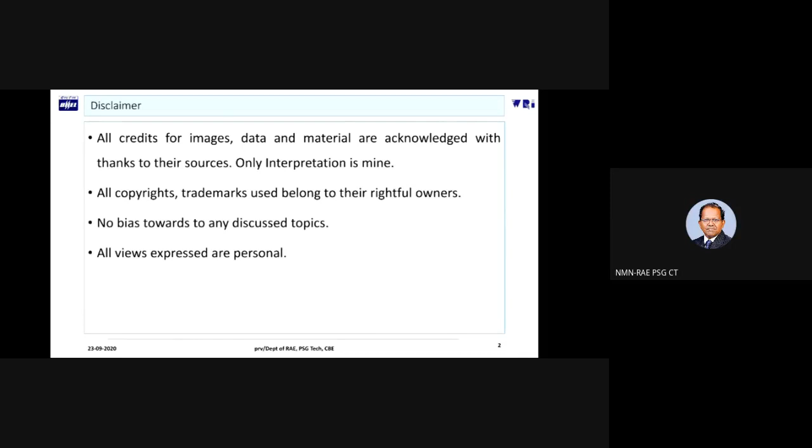Sir, audio is not too clear. Yes, sir. Yes, sir. Venkateswaran, sir. Venkateswaran, sir.

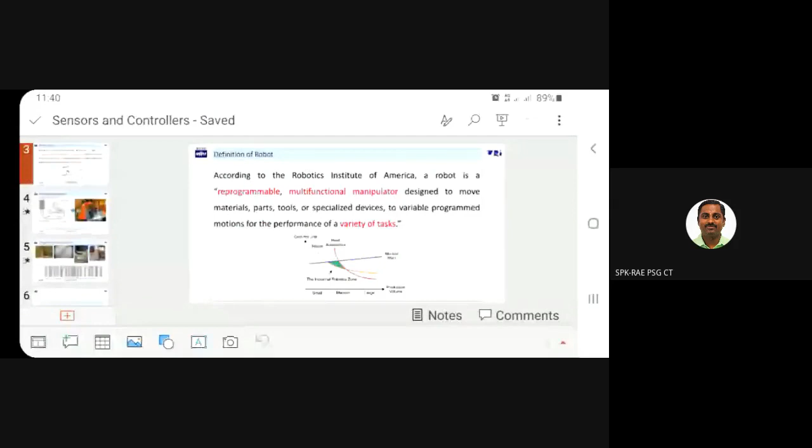So now I hope I am audible and visible. Hello? Yes, sir, fine, great. Sir, can you make it full screen, sir? Yeah, I am making it full screen. Is it okay now? Perfect, sir. Okay, thank you. Thank you.

So we will start with the definition of what a robot is, because this will give us an understanding of the background of what we are trying to understand as sensors and controllers. A robot is differentiated as a reprogrammable device, and it can be used for doing a variety of tasks. Now, when we say reprogrammable, and when I am aiming at a different set of tasks to be performed by the device, I need a set of inputs that are required for this reprogramming, or that are required for reorienting the device to perform a set of tasks.

So that is where the critical nature comes in - what type of sensors I need to consider, and what I am going to do with the inputs received from the sensors. So these two things are to be considered with respect to the nature of the definition that we are associating with the device itself.

Where I am looking at a medium volume of production and I am also looking at reducing cost, there could be an argument that if the volumes are more and if the costs are to be reduced, then we would like to go for a robotic automation.

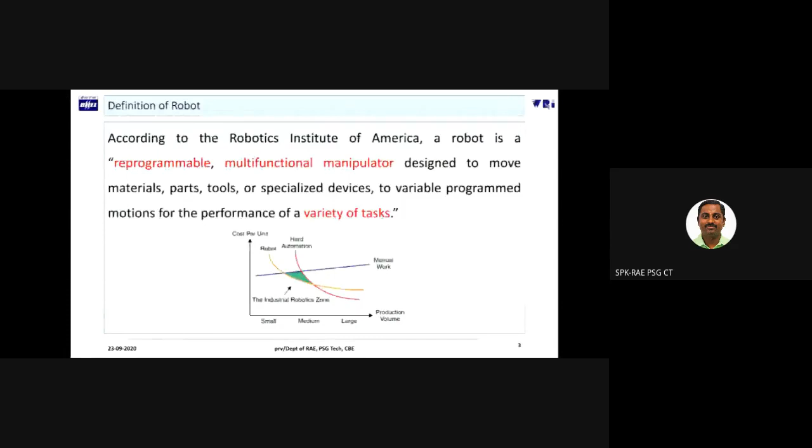So this is the introduction that I would like to consider for robots. Now we will take this robot into a welding option. Whenever we talk of welding, this is an image which I can give you as the definition of welding.

So we have certain set of equipments, we have the job or workpiece, and when the job gets connected to the workpiece, then I expect that the robot that I am going to use will substitute the functions of the human being that we are going to see over here. So this is what the figure will look like in case of a robotic welding.

So what is the challenge here? The challenge is to replicate the functions of the human being exactly to the process. Which means I need to be aware of what is happening in the mind of the welder, what are the things that he is going to sense, and then accordingly act upon those information. The same thing is to be replicated for the robot also.

Now, practically speaking, it is not possible to replicate a human being, no matter how good you are with respect to science and technology. It is practically not possible to duplicate the functions of the human being at least. So we can come somewhere near to the functions by targeting what he is doing and then trying to do it to the best of the ability of the available resources with respect to whatever that we get in terms of the inputs and in terms of the control action that is feasible with respect to the mechanical devices.

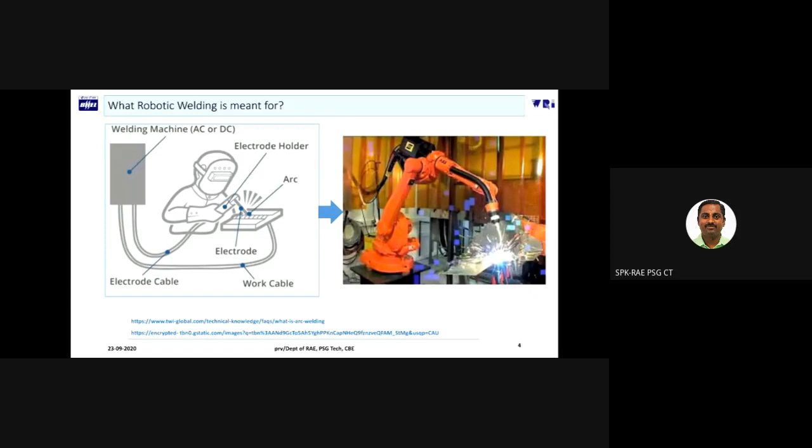So here I have two parts. One is the sensors, that is, I am going to take upon the inputs from the operating environment. The robot is going to take it, and then the controlling action, the robot executes some kind of a response to the information that is being made available in the operating environment. So the goal is to be as good as this welder in getting a quality weld done. This is what we are trying to define or see as an understanding for what a robotic welding is.

With this background, now we would like to seek what are going to be the challenges that this welding option presents to us. A typical problem with respect to any process is it should be possible for us to understand what is happening straight away. We call it in a very crude way, I would like to call it as linear.

Linear means I can get to have an understanding, or it is possible for me to extrapolate what is available as information into the future, so that it is possible for me to predict what is happening and accordingly take an action. We all know that welding is a highly non-linear process. Which means this is, as a process itself, welding is non-linear. And if I want to implement the process with respect to an automated environment, I add to the complexity of this non-linearity for handling.

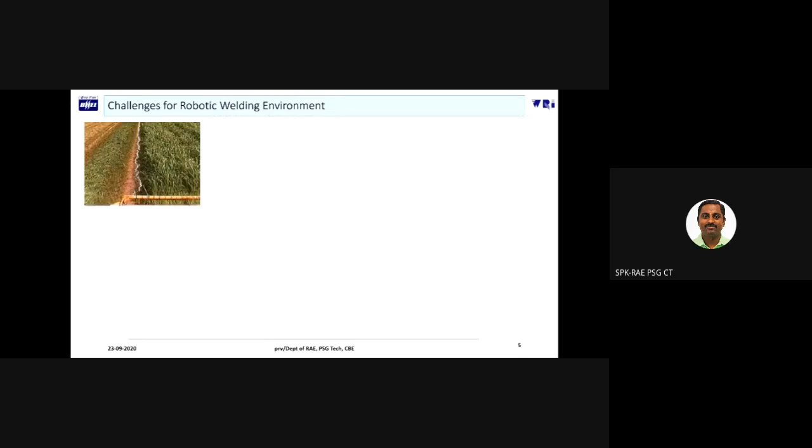So a simple example of what you call diagram is given here. This is an image of a crop field. Now imagine I'm going to do an automatic harvesting, using a tractor or some kind of a cutting device associated with a tractor. If my goal is to cut across the crop boundaries, it doesn't picture a linear movement here. Please understand, the white lines that you see over there present a varying profile with which I have to operate.

Same thing is being done with respect to what we call it as a weld. Weld seam is not going to be straight. So how are you going to accommodate in your sensing and control to aim for a proper seam? So this is the essence of considering a robotic welding sensing or control. This is very, very important for us, because what we typically consider as a perfect weld seam is available only on paper. Whereas in practice, we will not be anywhere near to this particular weld seam. Even that can be, what you can say, managed to a larger extent.

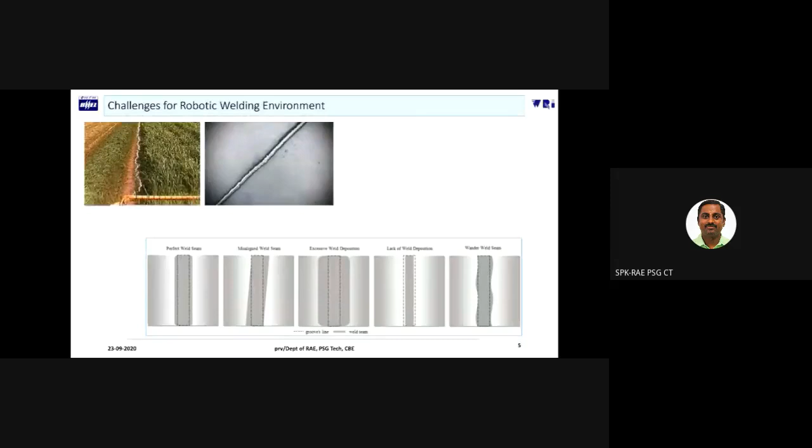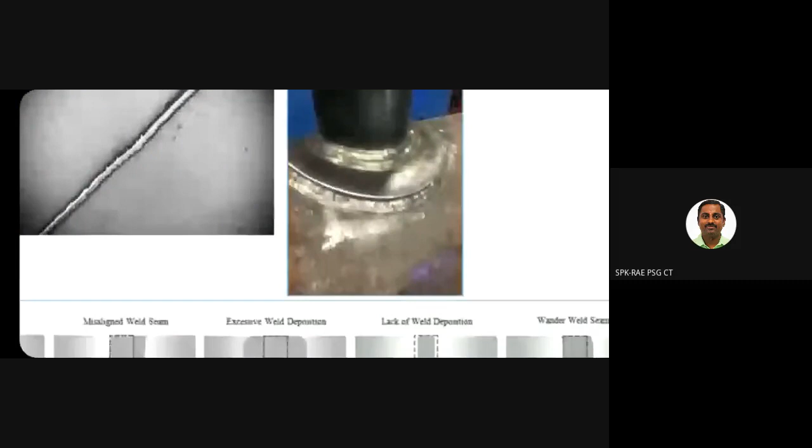Okay, if we have proper algorithms with which we can understand how the weld seam is going to take shape. But if I need to add more complexity, just look into this. The weld seam is not linear or as perfect as we would like it to be. In addition, I am also introducing another complexity in terms of the axis. Okay, so the job is going to be done on a pipe, for example.

The weld seam will have a profile which cannot be traced linearly. So in addition to how non-linear it is, I also need to understand in what profile it is going to be taken care of. So this is one task that I need to consider. I can increase the complexity. For example, I can rotate the job also.

Okay. So even if the weld seam is going to be perfect, so-called perfection, if I am going to rotate the job, then I am going to be in further difficulty in considering, with respect to direction and application, what should be my sensing and then control action. So the challenge is, in a way, a unary challenge, a simple challenge to perceive what is going to be the weld seam and then continue to operate with respect to the defined weld seam and accommodate the differences that are coming in practice.

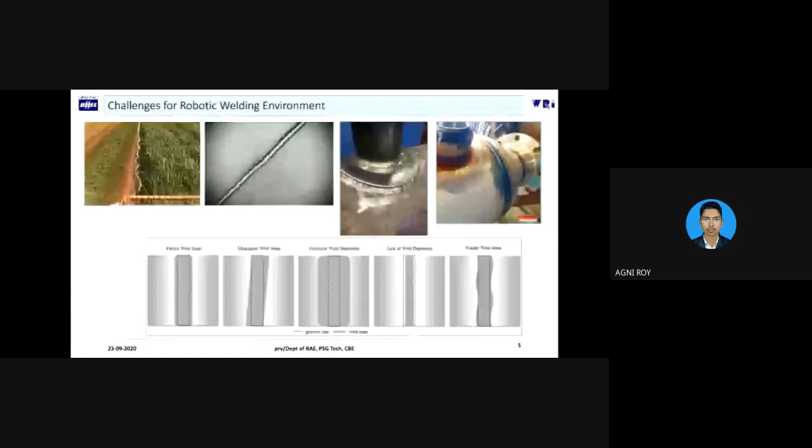So this is going to be the primary challenge that we face in the robotic welding environment, for which I am supposed to have sufficient sensors and I am supposed to have good enough control action. So with this background, now I will get into an introduction of what we mean by sensors in a robotic environment and what are going to be the different types that are to be discussed.

So before getting into the robotic environment, there is a slight differentiation that I would like you to consider. There are two steps in any kind of operational environment. So I can look for mechanizing the operating environment, or I can look for adding a robot into the operating environment. Both are not going to be the same, but the sensors that we are going to deploy can be considered as similar or having similar requirements. The objective of whether it is mechanized or it is going to be robot can be differentiated later with respect to the control action.

Basic difference between a mechanized arc and the robotic arc is with respect to the definition of what a robot is. It is reprogrammable. It is not a hard automated environment. Okay, so it is not a fixed task. Suppose, for example, tomorrow you would like to shift from one job to another job. There should not be any changes made to the setup in terms of hardware. You can just change your program and it should be possible for you to execute the task. So this is what we mean by a robotic environment, and it should be differentiated with respect to a simple mechanized arrangement to execute a welding action.

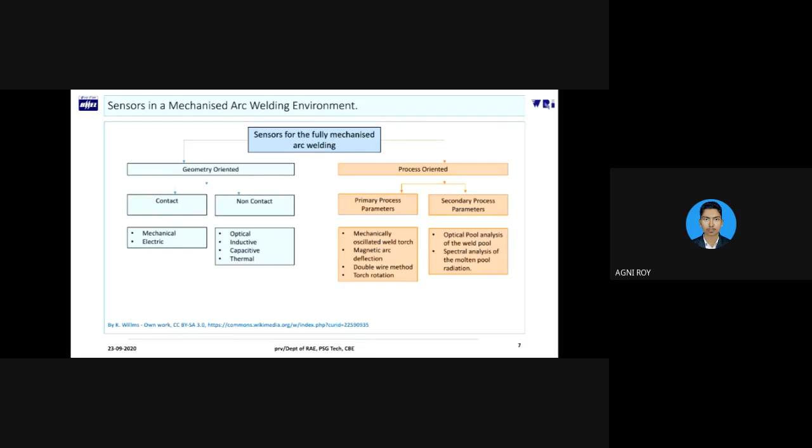Now, please understand this process-oriented sensing mechanism again will demand something of the kind that we have discussed in the first part, of contact or non-contact. So, to get to know, for example, the angle of the torch that is being used, I need to have some kind of a transduction mechanism which will give me that information. So, broadly, this is what a sensing mechanism for a mechanized arc welding environment will involve itself with. So this we have to consider for a robotic environment.

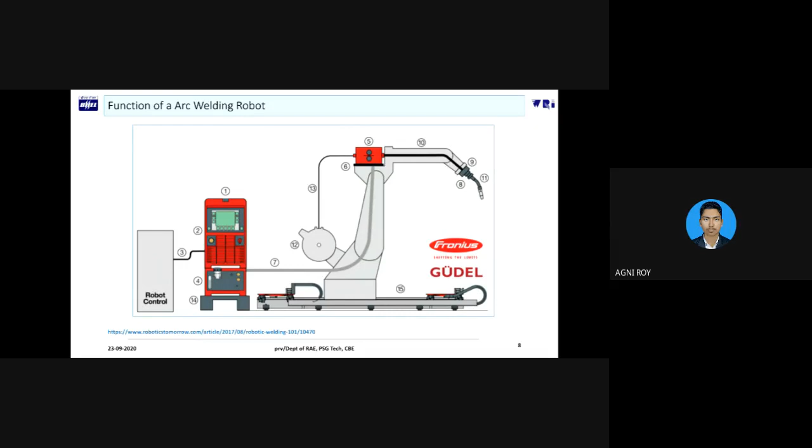Now we need to ensure that whatever information is available at the workpiece is communicated to the controller. The welding equipment is not the controller. A controller is a separate part which will be the master in this operating environment. It will dictate what needs to be done to the welding equipment, to the robot, to the torch, etc., so that the welding operation is executed as per the requirements. So this is the functional view of how we look at the welding robot.

So for this robot, what are the different types of sensors that we may be in need of? We can classify them, but we need to understand certain things before that classification. Sensors, like robots, come in a variety of shapes, sizes, and costs. Even functions we can add. So there is nothing like a generalization. Because a sensor works for a particular operating environment or for a robot, we cannot say that that sensor can be used for each and every option. We have to be very, very careful. We have to be aware of it.

The next part is still more interesting. A sensor alone is not good enough. Let us say I get you the best sensor possible, today the best available laser seam tracker. Just putting that laser seam tracker into your operating environment doesn't mean anything unless it is backed up with good enough programming software and also a reasonable feedback mechanism with respect to the controller.

So it always has to be ensured that the software that is going to be integrated with the operating environment is robust enough to process the information that is available from the sensor and then respond back to the environment. So this has to be ensured. So this is what we are trying to highlight as the positive aspect of how we go about a robot.

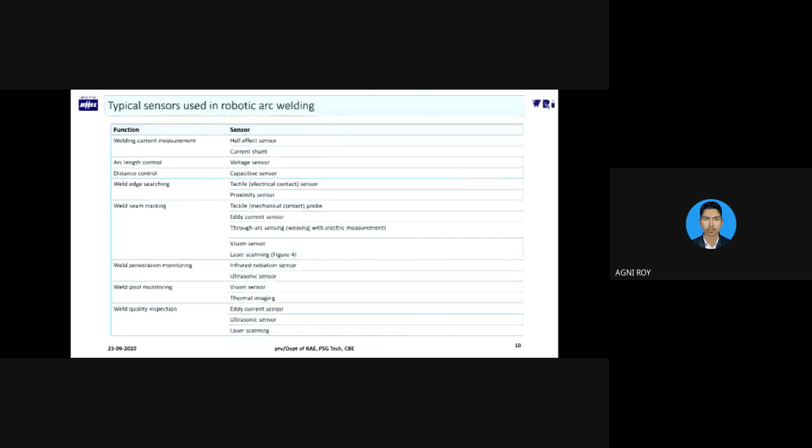So now we will get into the different types of sensors that could be related to robotic arc welding. In the previous case, we have seen that they can be classified as contact, non-contact, etc. Presently, we are going into specifics. To know what sensor, I need to know in the first place what information I am looking for. For example, I would like to know the arc voltage. Then I need a voltage sensor. This voltage sensor could be sourced from any of the transduction principles that we have considered before. It could be capacitive, inductive, non-contact type, contact type, etc. Those are all the possible types which can be used here for the purpose of the measurement. Similarly, I can go for welding current.

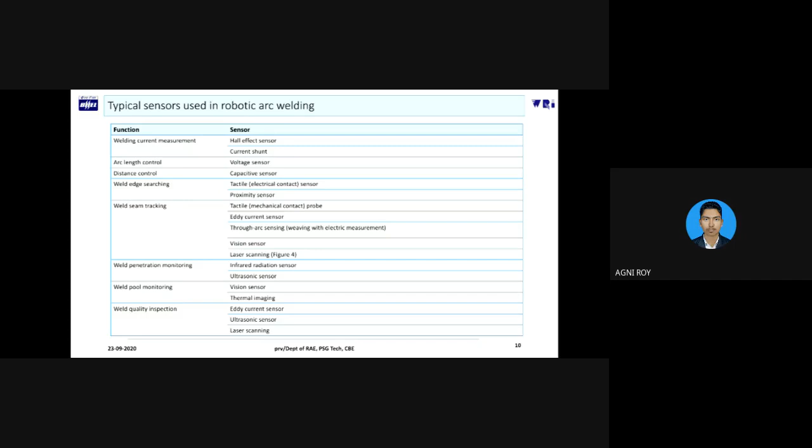For example, if you are going to consider a welding current sensing requirement for a robot, the best two options are either a Hall effect sensor or a shunt. Hall effect is a very rugged type of sensor that is available across different ranges. I can even go up to 1000 amps and 1200 amps, and it provides a very reliable measurement of the variable. On a relative scale, if you give me an option to choose, I will always go for a Hall effect sensor. But with respect to the placement, if I am not able to place it properly or the placement is not comfortable enough, then I would go for a shunt option. Shunt is also very rugged, but I prefer the reliability of Hall effect over shunt for current measurement.

Similarly, we can extend our requirements to arc length. Arc length doesn't give you many options. It has to be a voltage sensor. We typically measure it across the plus and minus terminals of the given welding equipment. With respect to distance, we have many options. The typically used option is a capacitive sensing mechanism. I can also use, for example, a proximity sensor. The preferred choice, we can say, is capacitive.

I can have the requirement of sensing the edge, or knowing where I need to start the weld or stop the weld. In that case, I can again go for a proximity sensor or a tactile sensor. There's a very subtle difference between distance and edge. Distance is the remaining path. The edge is going to be the beginning or the end.

So it is kind of a spot measurement. That is what we are looking for when we try to define this edge. Similarly, we are going to talk of tracking. Tracking is again a continuous mode of measurement. So we can use different options, scanning, vision sensors, etc.

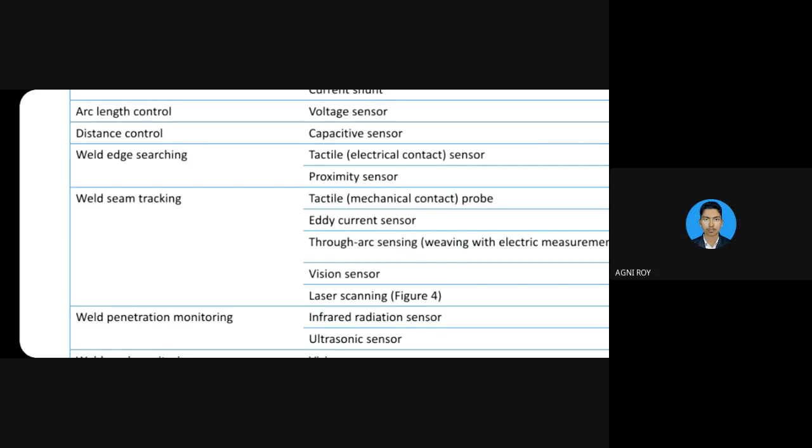So the features of the weld seam can best be correlated by using such image processing algorithms with a vision sensor. If your application is at a lower scale of cost competency, then we can use a simple tactile or other type of sensor. Otherwise, I would like to go for a vision sensor when it comes to weld seam tracking, because it gives the best possible results.

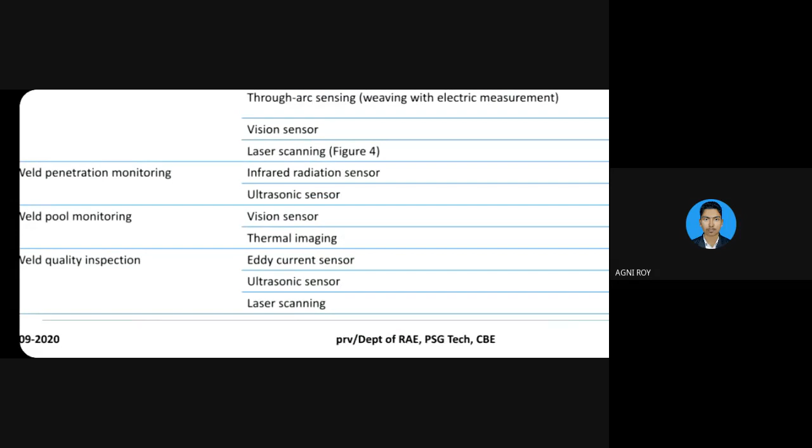Similarly, if you are interested in weld penetration monitoring, we can use a non-contact type sensor, with the principle of transduction being IR or ultrasonic. Weld pool monitoring is also possible, again using a vision sensor or thermal imaging.

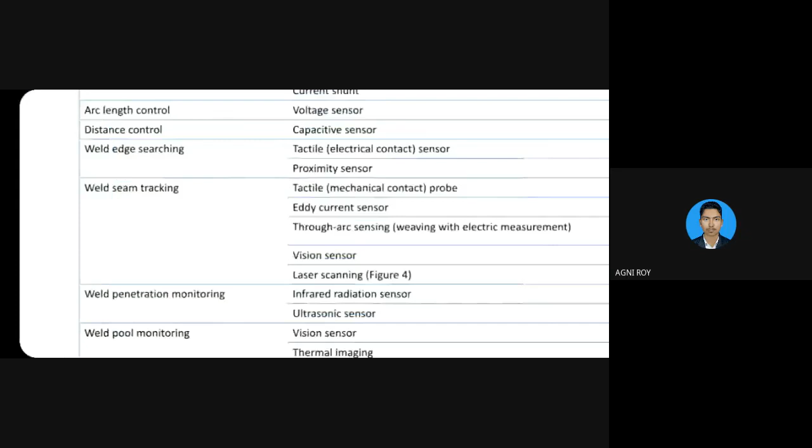We need to remember that in all these applications, whenever we talk of weld seam or anything related to weld, we are talking of temperatures around 3000 degrees centigrade. So we need to be very careful with respect to our choice of mechanism and choice of vision system, ensuring they are suitably protected and able to work under those particular operating conditions. These are the typical sensing requirements for which we choose our sensors from the table we have already given as types.

So now we will go for one of the four choices, if you remember. We are going with the first one: a very simple understanding of what a wire's touch sensor will do. In simple terms, we can call it a touch sense. It is nothing but having physical contact with my workpiece, which lets me know where to start with respect to that particular location. I can have the axis known before me, and deduce the location of my present touch with respect to my defined axis location.

So this touch will enable some kind of conductivity, for example electrical in nature. It means it will be measured in terms of some change in resistance, how much current is flowing in the circuit, and therefore where that particular location is. That can be easily correlated. So the conductive surface is identified as a point where I'm going to start my weld, continue my weld, or locate my...

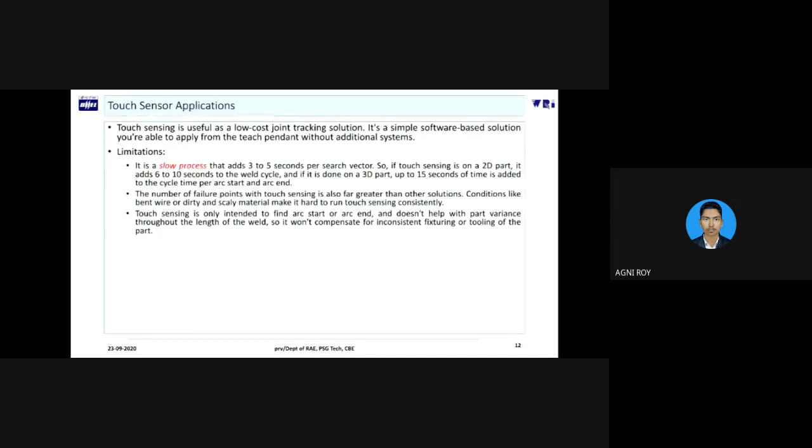So this is only intended to find an arc start and arc end typically. That is going to be the application, and it doesn't help with part variance. Part variance in the sense, let us say there is going to be high-low, unfortunately, in the fit-up. With this, it will not be possible for us to appreciate that.

So touch sensing only says point 1 and point 2. If they are misplaced, or there is going to be some kind of misalignment, for example in the joint, it will not be able to appreciate it. So you will go along as if it is a perfect fit, which means that your weld penetration or weld joint may become improper.

So the useful implication here is, if I have a very controlled operating environment for my welding job, this will work very fine. If there is going to be much more uncertainty associated with the operating environment, it is very important for us to be careful about what we are choosing here.

Touch sensing is also limited by weld joint type. How we go about it, because I need a differentiation, since energy flows only when there is a difference. I need a high and low reference to appreciate that the job has a height of 3 mm, 2 mm, etc. If I am going to have a butt joint, for example, I am at a loss, because I will never know where is my reference point. So it is very important that the applicability of this sensing mechanism be considered.

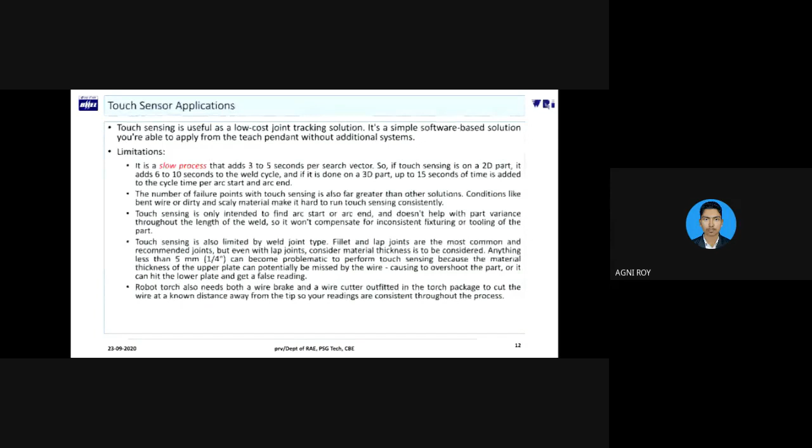The torch also needs to have some kind of extension, because, as I said, typically it is an electrical way of understanding. So when it is an electrical way of understanding, when you make a contact, the information is provided as the resistance in the conducting path.

Unfortunately for us, some kind of dirt, or over a period of time a small difference in the diameter of the wire because of heat, can cause a change in the resistance which can significantly change the value that you are going to sense, which becomes misinformation. So this is another interesting thing. We have to be very careful.

Either it has to be part of this torch mechanism, or it can also be done externally, like you do in a GTAW process, where you sharpen the tungsten tip at regular periodic intervals. A similar thing is also to be considered here. It also requires clean edges, which is something we have already discussed.

Now let me go a step further. We will talk of seam tracking. Instead of having only point A and point B and presuming a linear or nonlinear relationship between them, now I am upgrading my requirement to understand the instantaneous value of what the seam is at a particular instant of time. This is what we are trying to consider as a through arc seam tracker.

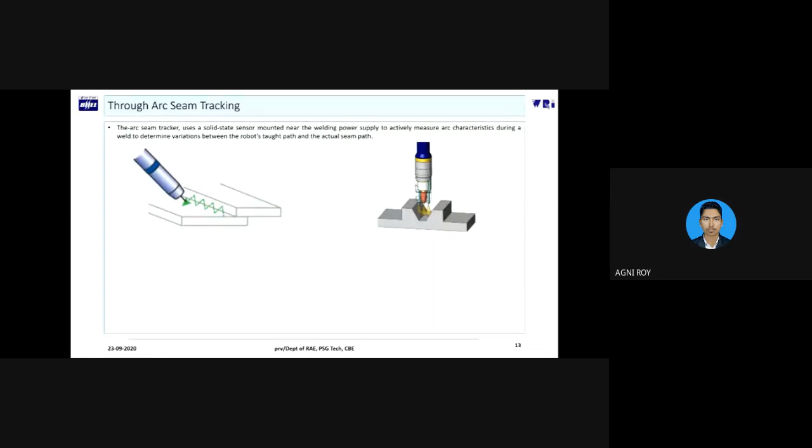Suppose there's a disturbance in the arc characteristics, then it indicates that something is not okay. So how do we compensate? We try to extract information based on what is available when the arc is actually being made on the job. Previously this was presumed, we had an assumption that it would be linear or exponential. Here it is actual, based on that particular disturbance at a particular time interval at a particular location. It will be possible for me to respond to what could be the actual state of the condition. So this is all called through arc seam tracking, that is TAST.

This is difficult with respect to thin material. Again, the problem is the reference is not with respect to vision, but with respect to location. So the limitation is it adds time. It may be difficult for us to perceive a difference when the thickness is less, and it is also limited to a certain set of materials, because it largely depends upon the conductivity of the material. If the conductivity is good, if it is very sensitive towards variations in electrical voltage, then I get a good reading. People who are not conductive, or outside the border of good conductors, will have trouble, because the signals we receive will not be reliable.

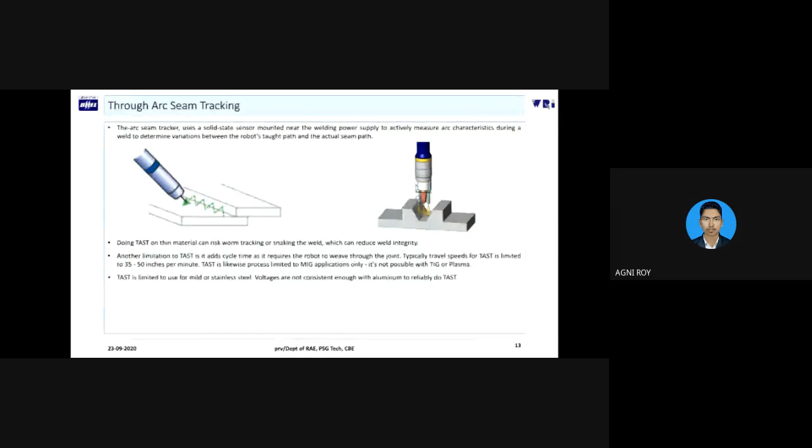So this is very, very important. I again repeat, when you go for the choice of sensors, please understand the operating environment. Consider all variables in your operating environment, including the material you are going to weld, because that makes a big difference with respect to what information you receive and how you are going to process it. The conditions of the material, here again, make a huge difference.

As I said, misinformation is much more dangerous than no information. If there is no information, we can suspect that something is not working. But if the information is misrepresented, then we have no idea. We will be giving a control signal which has nothing to do with the actual operating environment. So the conditions of the material have to be proper, otherwise we should not opt for this.

Dry runs cannot be simulated and observed directly. This can probably be compensated to some extent in a simulation environment, whereas practically, only if you weld will you come to know the arc characteristics. Therefore, any kind of dry run is limited in that sense.

That could be used for tracking. So these are all going to be part of what we call the robotic working environment itself. There is nothing to be added, probably the solid state sensor is an addition, but otherwise nothing else is needed for the robot to perform its duty. Now we are coming to a possibility of an upgrade, a technological upgrade, which will give us more precise information about what we are looking at.

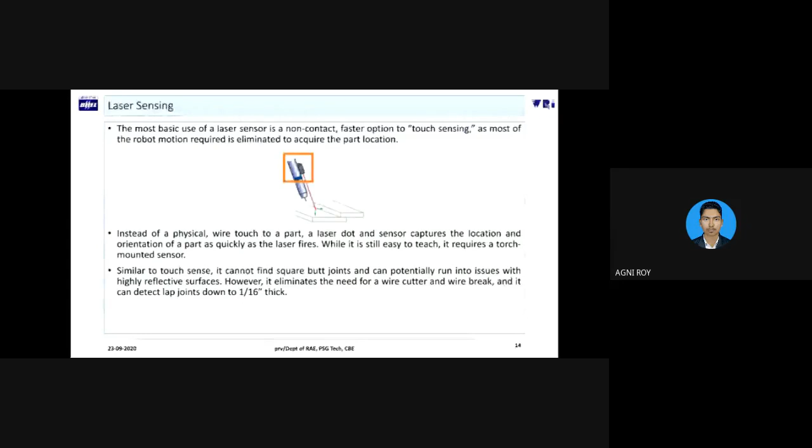Similar to touch, unfortunately, the principle of reference still applies, so it will not be possible for us to have it on an uneven surface. We need to be very careful with respect to square butt joints. It can potentially run into issues if there are highly reflective surfaces, since it works on the principle of reflection. So, for example, if it is highly polished stainless steel or such surfaces, we have to be very careful and calibrate it suitably to get the information back to us.

The biggest difficulty is you have to suitably mount the sensor, because that orientation has to be calibrated. It's not just a plug and play device. The mounting has to be done in such a way that the laser beam is at an angle which gives you a proper orientation and reference for the information we are seeking from the job.

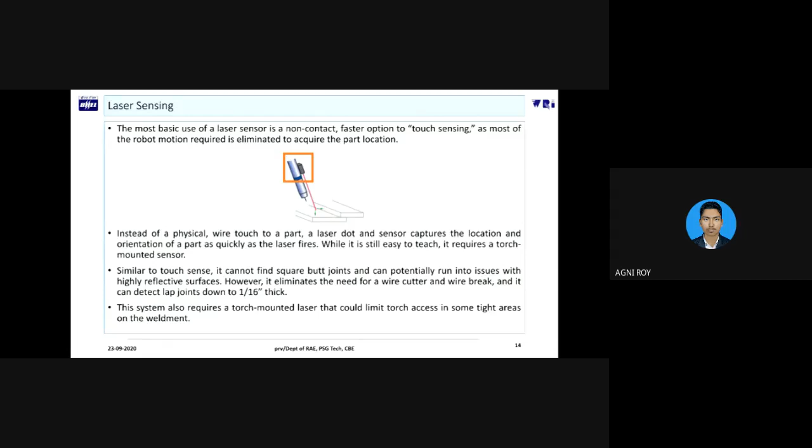We can eliminate this possibility also. Let us upgrade further and see how it can be done. That possibility is with respect to the 2D camera. Here, what I am trying to do is get an image of what I am looking at, and then process the image. The success of this approach is purely dependent upon the algorithm that you write to extract the information from the image.

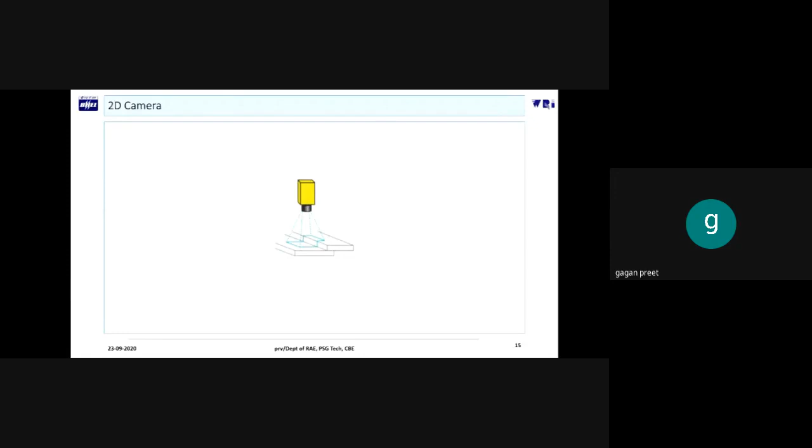Imagine, for example, the weather prediction photos you might have seen in news channels. That image is taken from a satellite thousands of kilometers away, but is processed in such a way that it is possible to understand the location, even down to a district in a state, and give information about rainfall or windfall for that area. If it can be done from thousands of kilometers away, it is possible for us to do it for the weld seam, which is only centimeters away from the camera. That is the concept here. This concept can be further divided into a possibility of 2D and 3D. Whenever you use a 2D system, it allows the user to capture the location with the camera sensor mounted on the arm of a robot.

The problem with respect to this approach is I need additional mounting space and flexibility, and the camera should be robust enough not to get affected in the sensing mechanism. The lens should be suitably protected from the operating environment of the welding. So that is to be concerned about.

Probably you may have to use gases, preferably inert gases, to flush the camera lens and keep it away from the actual part of action with distance. So this is, in principle, similar to our touch sensing mechanism of having reference points, but the higher end algorithm will serve the purpose of extracting useful information.

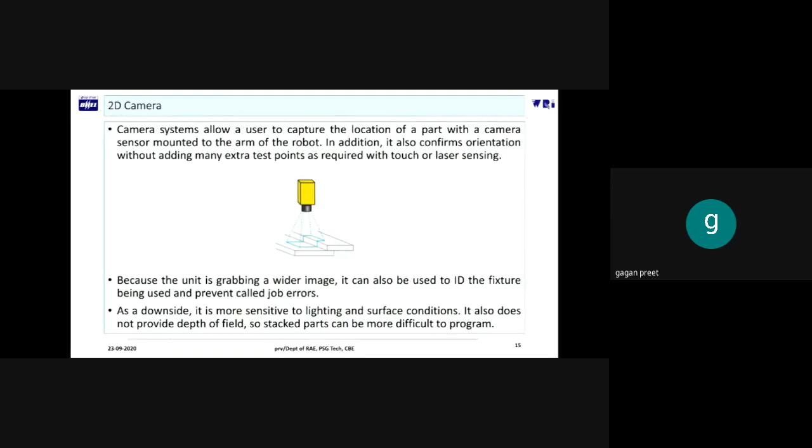The difficulty is it is much more sensitive to lighting and surface conditions, and it does not provide depth of field because we are operating with a 2D camera. So if things are stacked, or if you are interested in multi-seam welding, it is much harder to conclude what signal is required.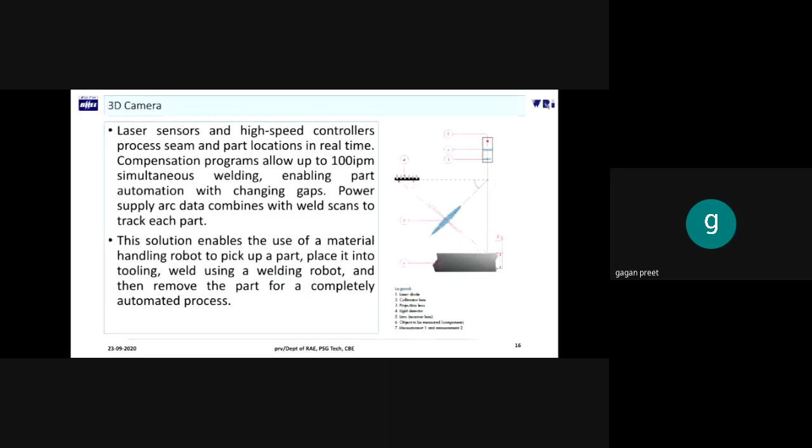This solution enables the use of material handling. I can extend it beyond the welding task, since I get to understand the operating space more specifically. I know the difference between, for example, the weld seam and the next part, which could be a spare or whatever it is. So there could be multiple things I can do with the same robot arm, since I am able to appreciate the difference between the objects present in the operating environment.

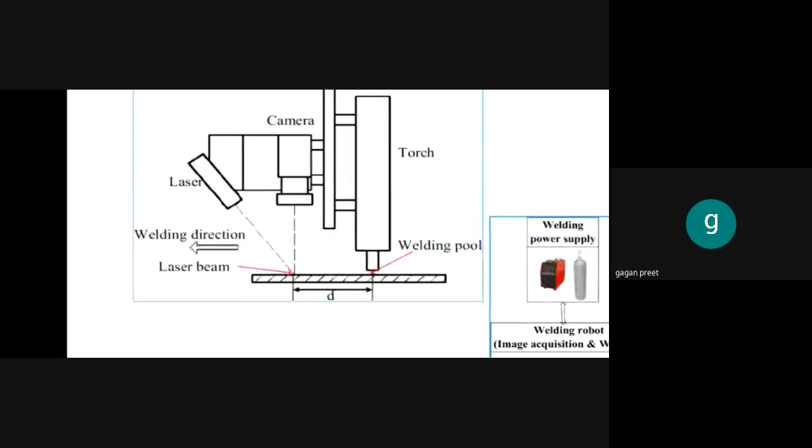So this is the general schematic of the laser tracking mechanism. I have a reference, so ideally we would like to mount the camera, and the torch is there, you can see here. The torch is mounted with the camera, and the alignment must be referred properly between the torch and the camera, so that the torch can be operated with respect to the inference of the alignment axis we are talking about for the robot.

So the laser is also fitted along with the camera. It will try to identify the seam. The camera will note the actual position, and the torch will act upon the information, so as to adjust itself to any requirements to enable the previously decided weld seam option.

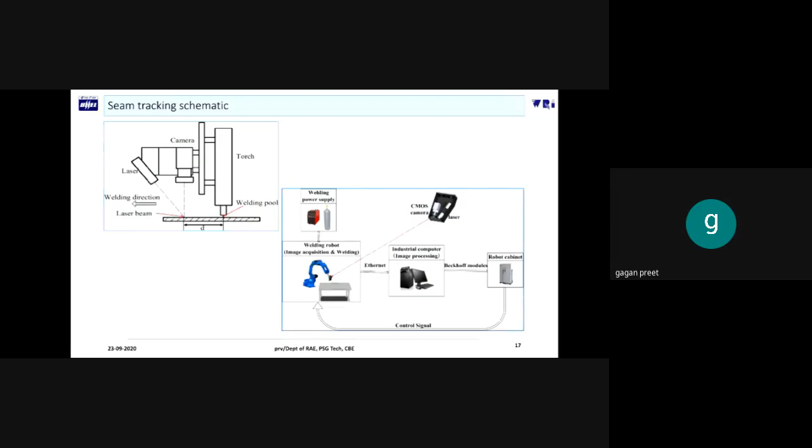So here the implementation is shown with respect to how it is getting done. As you can see, it basically has two more parts: one is the equipment, the other is the controller. The robot controller will act to execute the tasks that are already pre-programmed. This computer could be embedded into the controller itself, or it could be a separate machine, and we can even have hands-on and remote control mechanisms. It is possible. So this is a general schematic of a seam tracking mechanism.

So I can give you a summary. This is again with respect to how we go about it. Whatever we have discussed so far, we have a summary with respect to the advantages and limitations of each case. So with respect to a simple sensing mechanism, we have considered the touch sensing option.

We have discussed sufficiently. And with respect to the preview sensing, suppose I want to consider some kind of information that is available as an image or possible as an image, I can do it using different types of transduction principle. They have been listed here. For example, I can do it in terms of contact. Inductive type can either be contact or non-contact. Capacitive is a non-contact type of transduction mechanism.

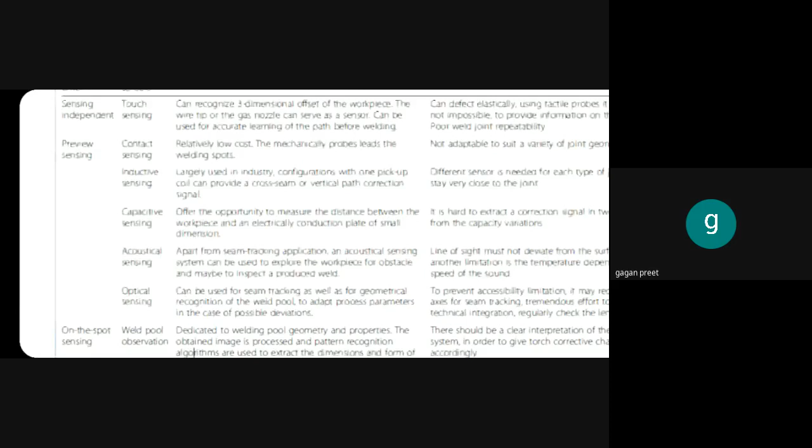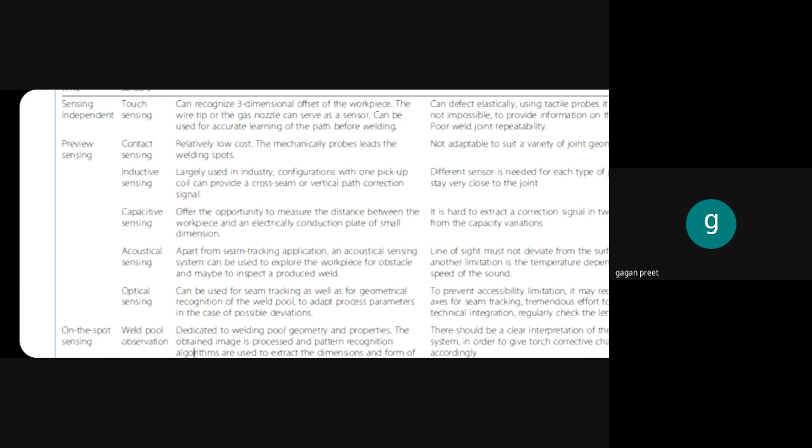Acoustical options are something like using the mechanism of ultrasonic principle, for example, which is an option that we need to consider for sensing. And optical sensing is photodiodes, photosensors, etc. Basically, they go for different types of these sensing mechanisms. A combination of factors. Probably the best illustration of how we go about non-contact type is photoelectric sensors, which is optical sensing. And the best use of acoustical principle for sensing the depth, etc., is ultrasonic.

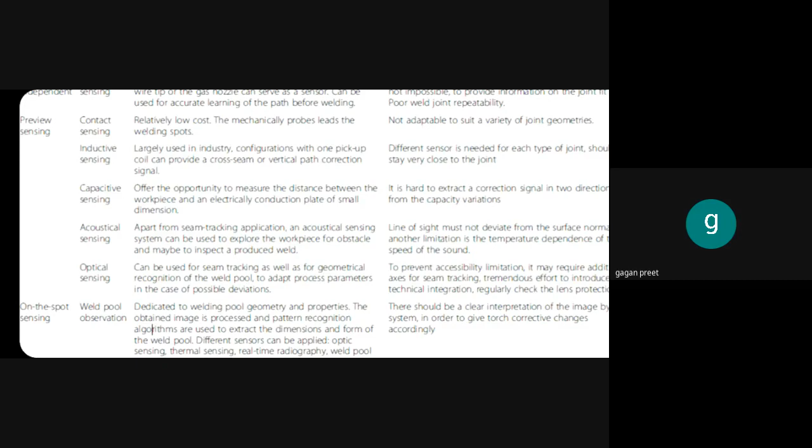If choice is given, probably I will choose ultrasonic over capacitive because it's much more reliable with respect to what I measure. Each of these methods has a particular difficulty. We need to verify whether it will suit my requirement. They are available in the public domain. Before going for any particular choice, we also need to evaluate whether it will serve the purpose of my operating environment sufficiently.

Beyond this, we can also go for, for example, at a higher range a weld pool observation to evaluate the power source or to consider the spatter or whatever it is. That is also possible. Or we can simply talk about sensing the arc, whether the arc is in a straight line or there is some kind of arc blow or disturbances, whether we need to act upon it by adjusting the voltage and current parameters for the arc. So my only request is don't make any generic observations. Please be aware that any of your choices will be with respect to a particular operating environment.

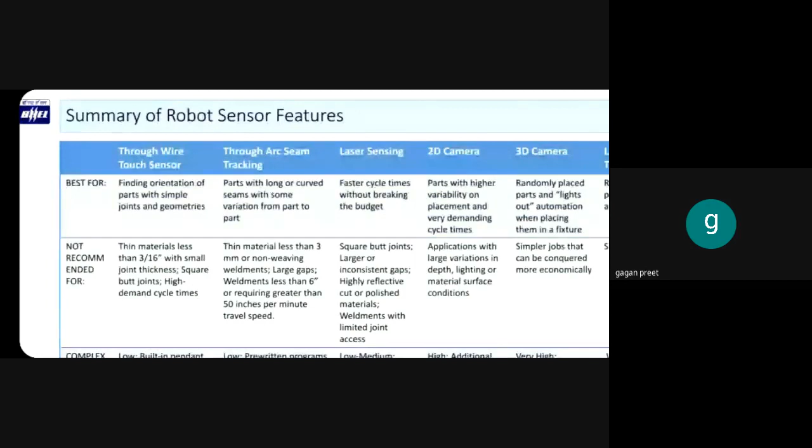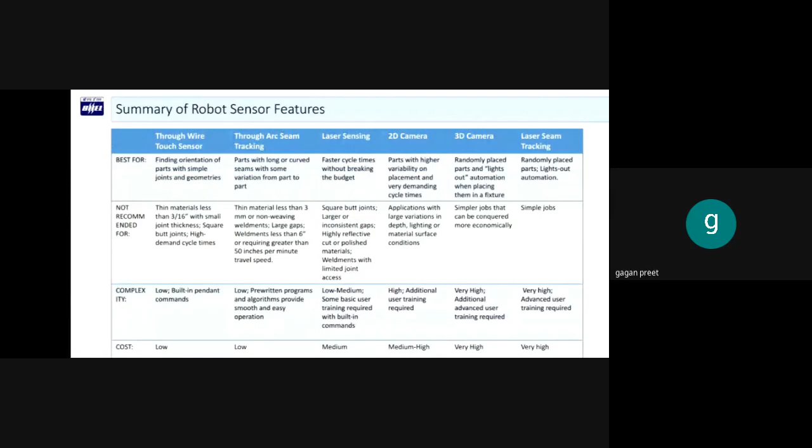The same thing I have rephrased with respect to the types we have considered. As I have described the touch sensor, the simple through wire sensor is at the lower rung of the ladder in terms of complexity, and it is the easiest to apply. It doesn't require any additional complication of hardware or software. The 3D camera or the vision system, or laser seam tracking, which is just a variation of 3D camera where I just use a laser source, is at the highest level. So with respect to the complexity, cost, and applicability, we need to choose between them. The features have been described here.

As I said, cost is important because it has to be related to the volume. So if the per piece cost is going to be high, we need to look for a mechanized solution, something we call hard automation, not a robotic solution. It's not fun to have a high cost solution for the sake of it. So please evaluate your option, the return on investment, with respect to your choice. If that return on investment takes too long or is too risky, because technology keeps on changing and we do not know whether after 2 or 3 years we will be considering the same setup for production, then we have to have a quick return on investment.

So how do I choose? We have already discussed many of the things. I will just run through some of them. It is basically the function of how good a sensor is, and how good a sensor is represented with respect to its characteristics like range, accuracy, repeatability, reproducibility, linearity, etc. I don't think we need to discuss it; it's all basic definitions. They cater to how good the sensor is with respect to my requirement. I hope you are able to appreciate. And something has been defined over here.

Sensitivity is very important. Why I have defined it here is, it is very important when you are going to respond, if I am going to sense the change late. It is very simple. You are driving a vehicle and you need to apply the brake. The sensing mechanism which provokes you to apply the brake should be quick enough. If you see an obstacle and you are triggered quite late for the control action, then it is of no use, no matter how good your control action is. So that is why sensitivity matters.

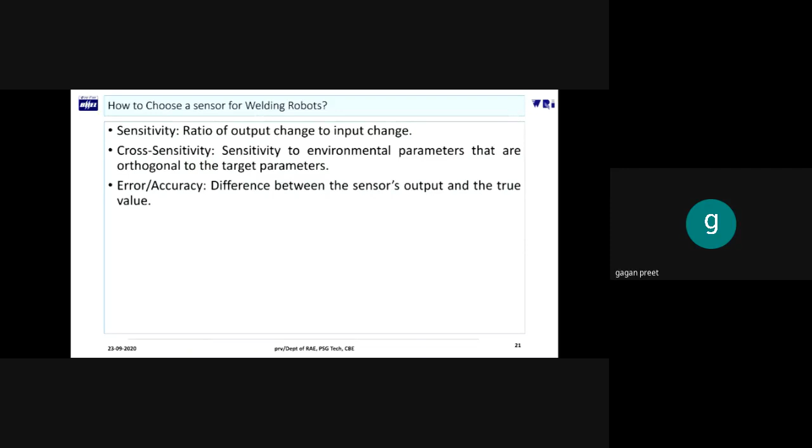Sensitivity again is with respect to cross sensitivity. Please understand, your operating environment is very difficult, it's not linear. It has a high temperature component which could destroy your sensitivity quite easily. So a 10-degree rise, a 100-degree rise in the operating environment, what will it do to your sensitivity? It has to be taken care of. Error, random error, all those things. Reproducibility is, under similar conditions, whether I am good enough to come back with the same results. So these are some of the aspects of choosing a sensor.

So with this background, I presume that we have sufficient information on robotic sensors. We will come to the controllers part. I would like to stop here for a few moments. If you have any questions, you can ask now, or I will proceed and take them later. Shall I proceed further, or are there any questions with respect to what we have seen so far?

Sir, there is a question in the chat box. I am not seeing it. Can you please read it for me, if you do not mind? Sir, with regards to camera utilization for seam tracking, what will be a typical image or video acquisition rate used for tracking the weld seam in real time during welding?

Okay, looks like there are multiple parts. One I understand is with respect to the resolution of the camera that you are talking about, or number two is with respect to the processing rate. Okay, yes, so it's more of a pixel image.

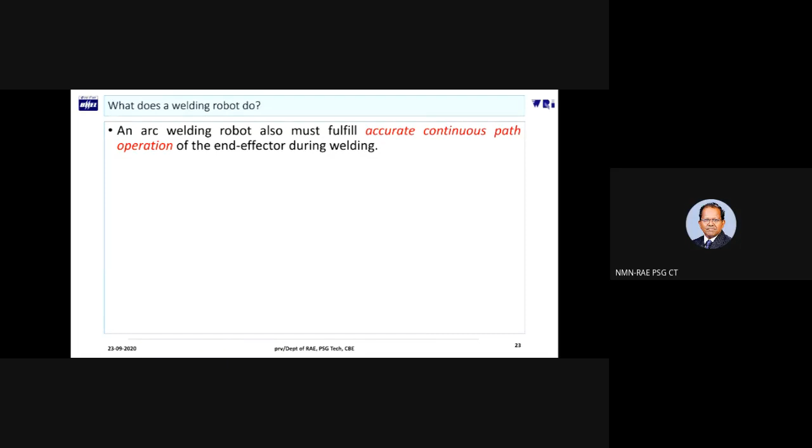So when you say control, we need to understand what the welding robot has to do. A welding robot, in a very simple definition, must fulfill accurate continuous path operation. That's all. It should be accurately following a defined path. The defined path will have some kind of shape changing in real time due to the deposition of the weld metal. For this to happen, it is not sufficient to have sensing, and I cannot act in isolation.

The challenge, unfortunately, is my robot could get connected to any welding equipment possible. You may get connected to the simplest inverter-based power source, or to the most high-end, which gives you the heat input per drop discharge of the weld wire. So in such cases, how are we going to act? It should also be capable of selecting, setting, and tuning the modes according to the requirement and what I have as an input.

The resources are to be manipulated in real time. That's what I mean by on the fly, so that the welding robot can act properly. And most importantly, I do not want to have five different types of connections. I would like something like an emergency switch, single point operation, in the welding robot configuration. So this is the background of what I expect my welding robot to do to achieve the requirement.

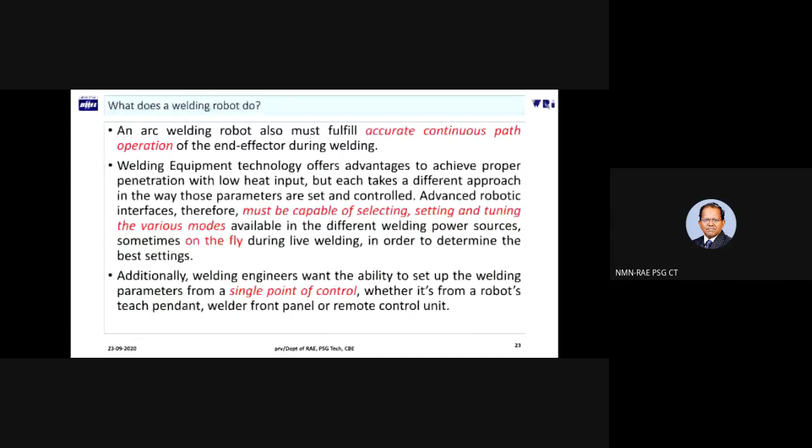In this context, I am going to define what a controller for a robot will be. The control system behind the so-called controller of an industrial robot determines its flexibility and efficiency within the limits set beforehand by the design of the mechanical structure.

This is very interesting. The design of the mechanical structure, that is the operating environment, is already fit to the robot. So when the information comes, it understands the context of the information. What I am being asked to do, respond immediately, go to location, means what is known because I know what I am operating with.

So the purpose is to provide a logical sequence for a robot to follow. Unfortunately, during welding, there comes a spatter along the path, generated during welding. I am in real time. Now I have to consider that deviation with respect to the spatter. That means I have to make a change in that sequence that is being dictated for my operation. So when I say the control system will provide a logical sequence, it includes the deviation with which I can operate, take over, and then continue.

The system will provide a theoretical position value for each step I am supposed to follow and continuously update on the actual position. So the robot should be able to be receptive in real time to get that information and execute it. And as the robot operates, the control system evaluates this difference and together with all other associated data produces the actuation required for driving the robot to its destination, which is the follow-up of the weld seam.

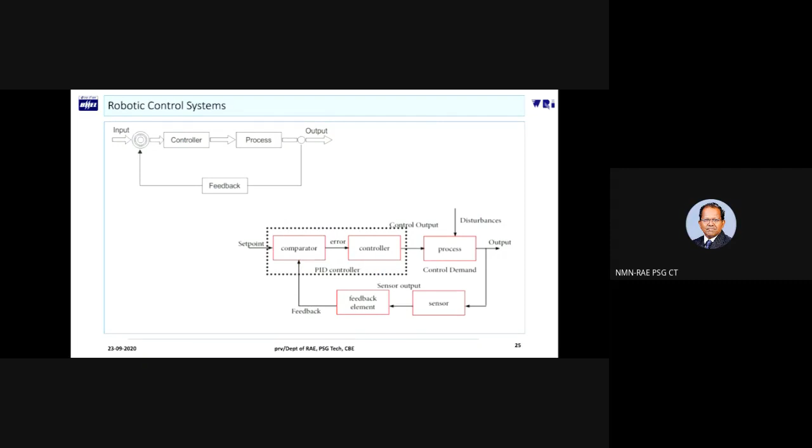So now I have to be aware. When you say I am going to control, I need to know what are the inputs to my system and what are the outputs of my system. Then only I can map the correlation. So we would like to revisit a typical schematic of a robotic welding environment to understand what are going to be the inputs fed to the robot and what the robot can do, which is going to be identified as the output.

So this is what I'm going to consider broadly as the inputs and outputs for the robot, for which it can relate what is happening between the input and the output as a control action. The inputs can be segregated for a robot as internal or external. Internal is nothing but those signals which form the feedback to monitor and control the joints of the robot - we will see what the joints are, nothing but the different actions of the robot. External are those which come from the operating environment, used for controlling the operations with respect to all other associated devices or signals of the operating environment.

Now, how I am going to take action finally is the end effector. So any control signal - turn, rotate, go straight, stop, start, whatever I tell the robot - is going to be implemented practically using what we call an end effector. An end effector is nothing but something attached to the robot's arm or wrist, and it allows the robot to accomplish that particular task.

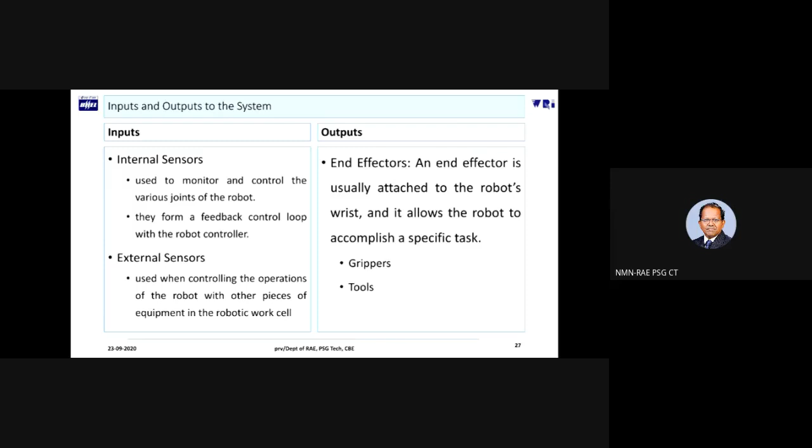So practically, we have two different possibilities: either I am going to use it as a gripper, if it is going to be handling a part, or a tool - a welding torch is nothing but a tool. Based on this, I can evolve four different types of control actions. One is what we call a point-to-point control action. These control actions are realized as software algorithms - I can program, I can give the values, I can decide how it is going to be taken care of.

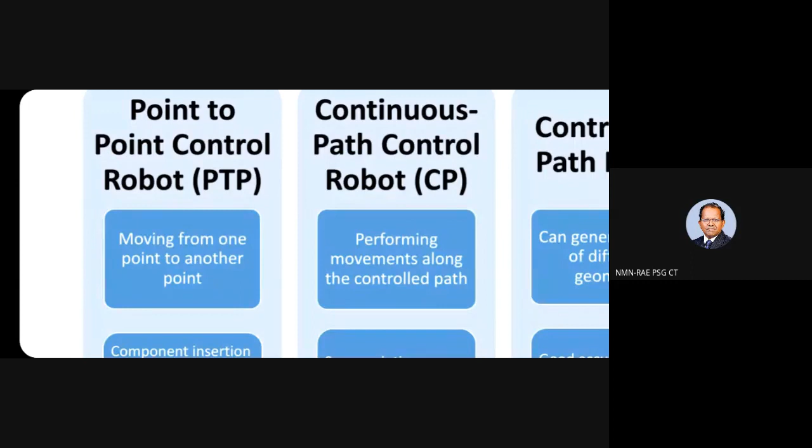A point-to-point control robot is nothing but moving from one point to another point in a pre-designated way. This is typically useful in applications where I would like to use spot welding, hole drilling, loading, unloading, assembly operations. The nearest welding operation possible with this is spot welding, where all locations are predetermined. I just need to execute them, moving from point to point. This is called a PTP robot.

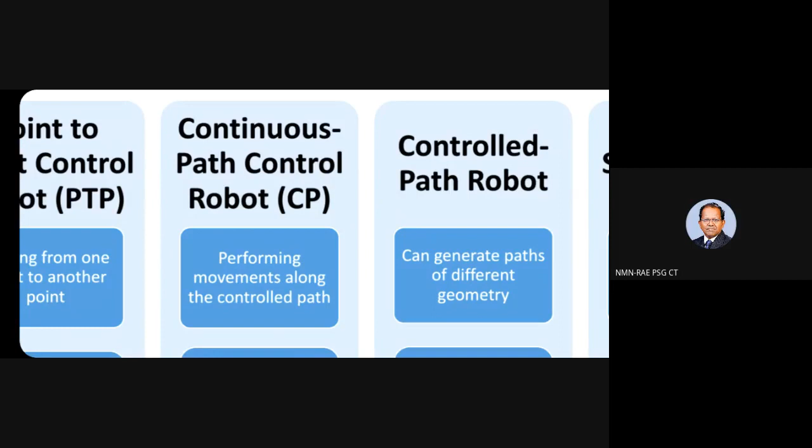Or I can look into a continuous path control robot. What do you mean by continuous path? Performing movements along the controlled path. I have a weld seam, for example, and I'm going to do a fillet weld. I have to move along the fillet weld seam, so then it is a controlled path, controlled with respect to the actual seam.

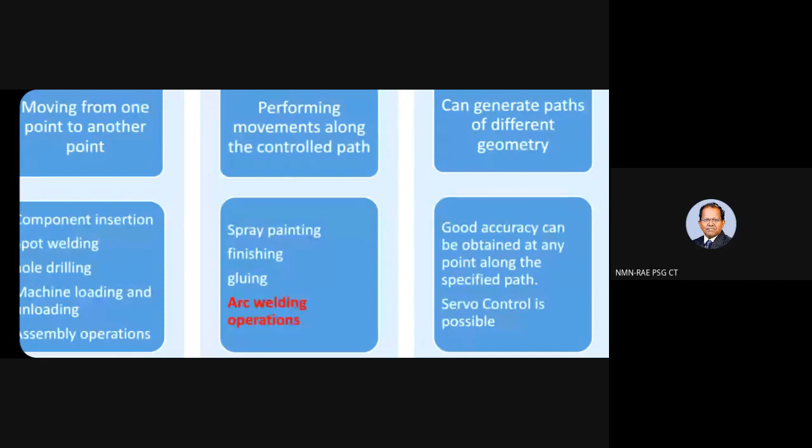The best example is always arc welding. Other examples are painting, finishing, pasting, etc., differing upon what type of tools you are going to use. An extension or a variance of this continuous path is also a controlled path robot.

It is like, imagine instead of... I will give you an example. Suppose I am going to use a drone. You are familiar with drones today, one of the fascinating aspects of today's technology. It is a very interesting question for you to think about: can I call a drone as a robot? Please think about it, I do not want to answer now.

So what a drone does is, it has a predefined path, a continuous path. But for a movement from A to B, I may have to take deviations from both. This is what we call a servo type of movement. My goal is to start from A and reach B, that's all. In between, if I have to take a detour, it is allowed. Please take a detour, if there is an obstacle, take a detour and then go. So we are using drones, for example, today to deliver e-commerce products. Very likely they are going to be servo controlled. So this servo controlled is what we mean by a controlled path, wherein we are going from A to B.

Any path is acceptable. Please understand, for welding application, the servo control is not what we are looking at. It is not that you weld from A to B taking any path, that is not allowed. It has to be a continuous predefined path. Any obstacles are to be suitably compensated. This is very important to understand, this control option exists.

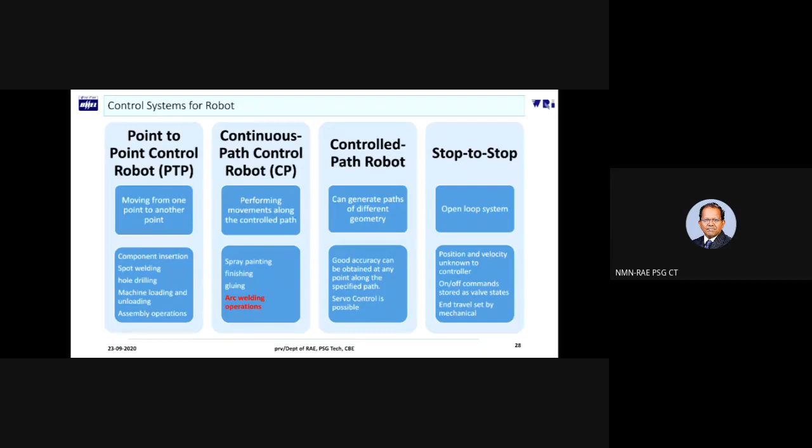When you go for different types of controls, it depends upon what type of actuation mechanism or end effector I am going to use. I can move, for example, faster, or I can simply move from one point to another point. I can apply more force, I can exert more force, etc. So accordingly, the control action can be classified into different types of motion, servo, dynamic, etc. They are all different forms of control, but the end effective means maybe the same. So need not break into much confusion with respect to this. It is a nomenclature used for a particular type of control action that is getting executed.

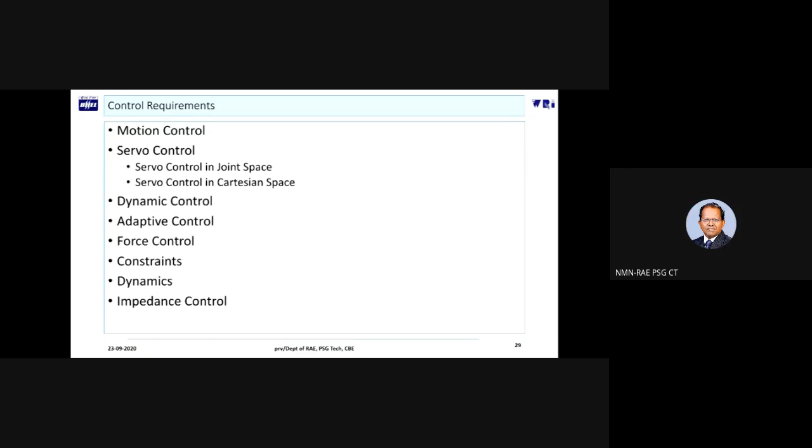Joint is very important because that will also help us define what we mean by the control action or type. In a robot, we can have 5 different joints. A linear joint, for example, is nothing but a relative movement between the input link and the output link. This input link and output link will be defined in the robot, and the link is defined as a translational sliding linear motion, where the axis of these two are going to be in parallel.

With respect to my options of how I make a movement, it can either be linear, orthogonal, rotational, twisting, or revolving. They all go with the simple dictionary-defined terminologies of what is meant by linear, orthogonal, rotational, twisting, and revolving.

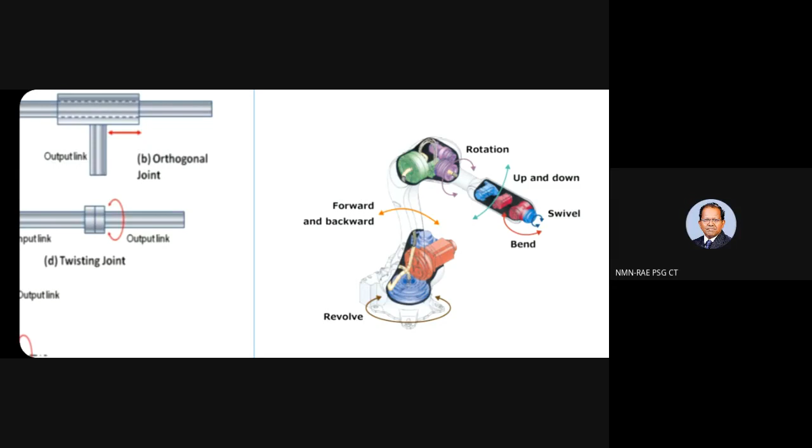The control signal will be the same. Please understand this. Suppose I am talking in terms of current, the control signal may be 10 milliamperes. What this 10 milliamperes is going to do, whether it has to rotate, move up or down, or twist, is to be determined by your control program. So you have to write the program in such a way to convert the control signal into an appropriate joint movement for the robot to take that effective action.

So this is the end result of the control action for a robot. This can also happen in a cascaded way. Please understand, in a robotic environment, it need not be a one-to-one control mechanism. If that were the case, I would have 100 types of requirements and 100 controllers. No, I can club them together. I can have a hierarchical control action made possible for the robot.

So joints will be the field marshals. They are at the field level, and their response behavior will be clubbed together as per my understanding of the functions, and then made into a supervisory algorithm at appropriate levels - 1, 2, 3, 4. This you can define; it is at your convenience to decide how many are to be there in each level, and accordingly how we are going to execute.

So to know this, I need to know what are the joints in my robot, how many of them, and of which type. That knowledge will help me decide practically how it is going to be done.

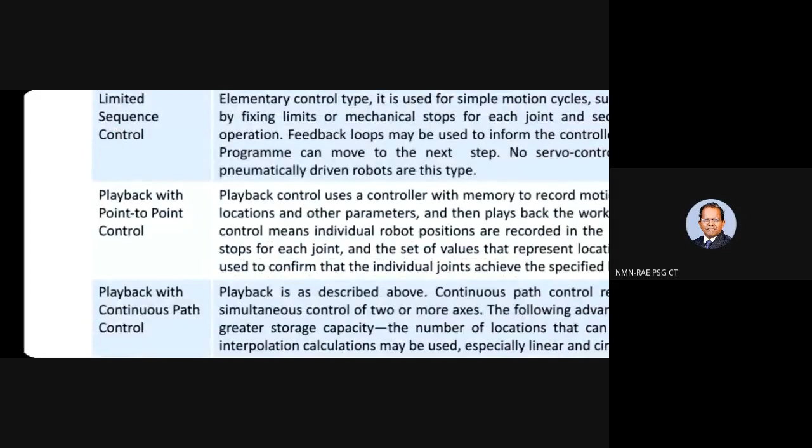Now, this logic of how I am going to execute the control action can happen in different possible ways. The first one is a very simple limited sequence control. As the name indicates, it's a kind of simple motion application wherein I just move. Nothing much of complex activity is getting done. This movement can be used for picking and placing, or to slide along the weld seam, etc.

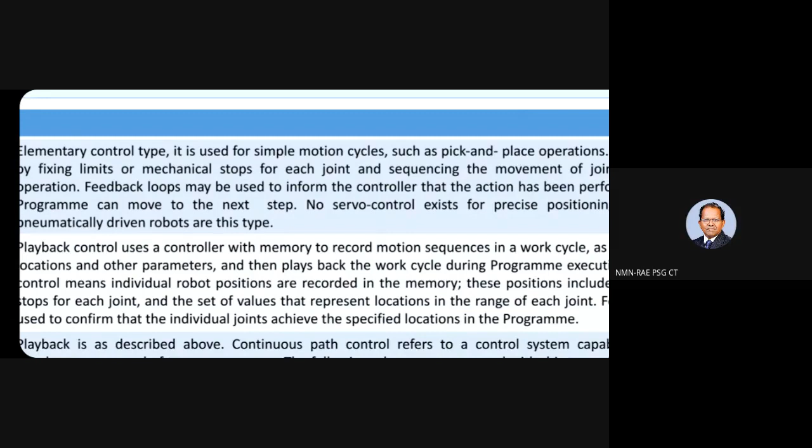For example, if I have an excellent operating environment and my fit-up is 100% perfect, all that I need to do is simply slide the torch along the weld length, that's all. In that case, the operation can be executed with limited sequence control.

The playback with point-to-point control has a memory to record motion sequences in a work cycle, and I can repeat it. This repeatability depends on how good your operating environment is.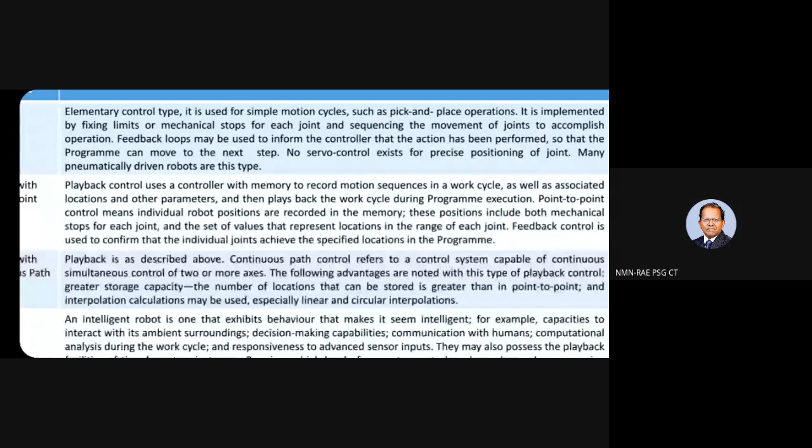For example, even if - this is a very exaggerated situation - you expect lots of spatters, there could be some kind of repeatedly evasive action programmed to compensate for the spatters. That can be programmed with respect to this playback mode to counter such situations whenever spatter occurs.

Playback with continuous path is where you are trying to have the information in real time. We have already spoken about, and I hope you are clear about, the differentiation between point to point and continuous path. Point to point is define A, define B. Continuous path is where we are trying to trace the path with respect to real time information.

So for example, you have done a job for 300 mm, welded a distance of 300 mm. What happens at the distance of 150 mm need not be the same when you take the next job. But you can always record - next big thing is going to be data. When you analyze data, you get patterns which can suggest some kind of predictive control behavior for the robot to take evasive action. So that could be helpful if you are going to use playback with continuous path.

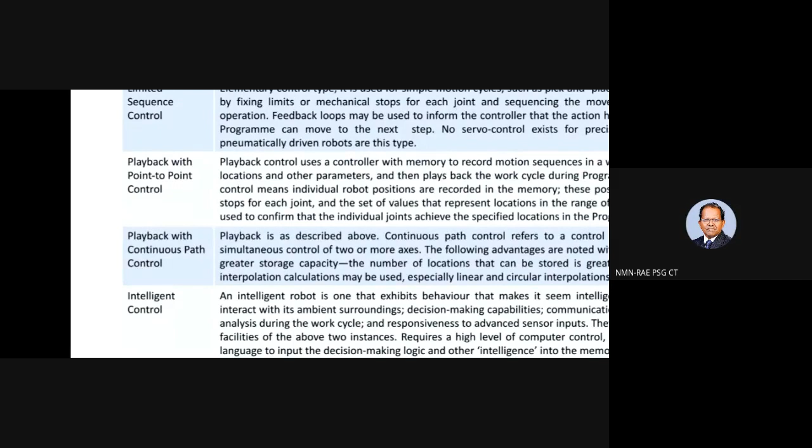The biggest or ultimate form of control that we expect is to replace the human being. All this robot business, whatever sensing mechanism we are using, etc., is to replicate the human being. What if you are there?

You need the best control action for the operation to be completed. This is possible with what we call an intelligent robot. Intelligent means we are trying to match the thought process of a human welder, who can weld with minimum defect or minimum disturbance to the process. There are 4 different types of control possible.

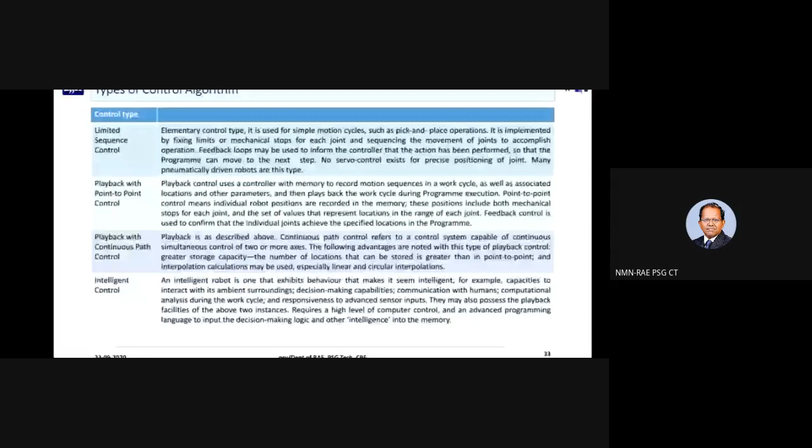The demands of an intelligent control are that I need more inputs, more sensors, more information, and that information in real time, along with more quickness in my response. I have to respond immediately to the considerations needed.

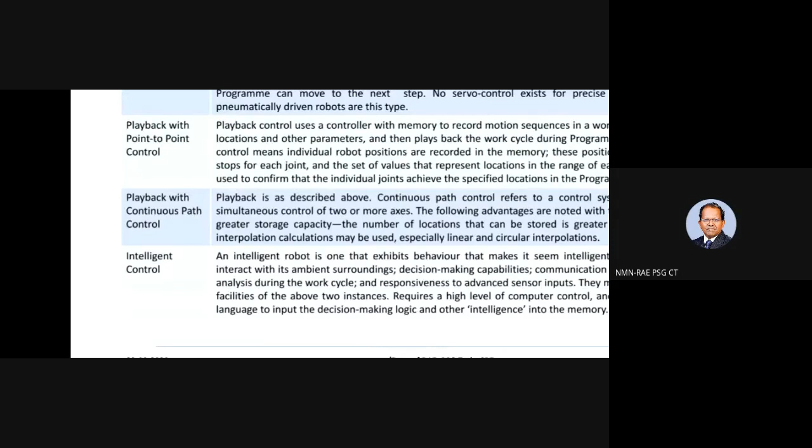Let me talk of a possibility. Welding, one of my favorite definitions, is a series of short circuits. These short circuits happen in something like nanoseconds or microseconds. So how do we deal with a disturbance that occurs in nanoseconds or microseconds? Can your torch respond to that? Can you understand that a disturbance has occurred in nanoseconds, take a suitable corrective action, convey it to the torch, and have the torch act on it? This is what we mean by an intelligent control.

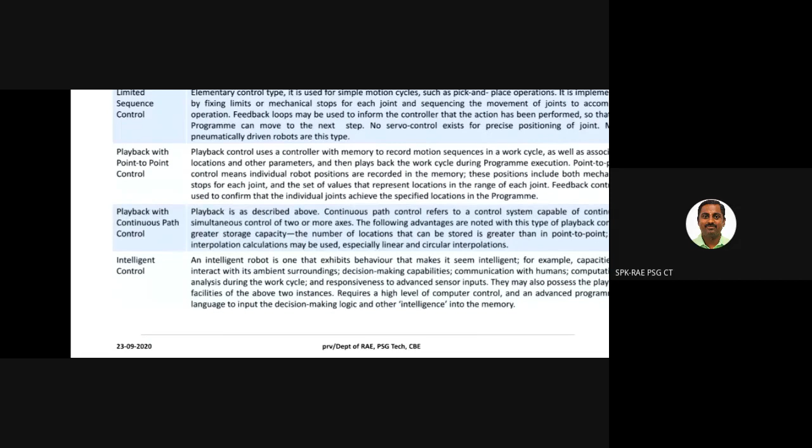If you couple your robot with something like CMT or any low heat input welding equipment, the demand is higher, but you also need to understand whether your job requires that type of control. If you're working with titanium-based or other aerospace alloys, it is required. If you're looking at carbon steel and typical run-of-the-mill fabrication, probably continuous path control will do the job for you. So this needs to be evaluated with respect to your work environment.

There are 4 different possible control algorithms we can look into. The typical control architecture is provided here.

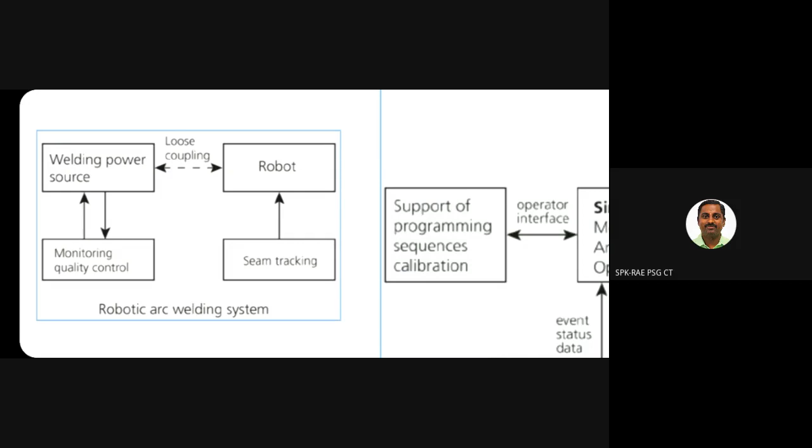All I'd like to tell you in this particular case is that we are in a loop wherein we have a sensor, and that feeds back to the robotic arm for control. This needs to be done at the quickest possible time with the most appropriate control action. This will be determined by the choice of programming languages and the choice of interface you have with respect to the setup you are going to have.

What can be incorporated is automation to the extent that you can even monitor whether your WPS is being followed faithfully. Suppose my WPS says I have to operate between 140 and 160 amps. The compliance is very, very essential and has to be recorded.

When this happens in an automated environment, my robot can always produce a report stating that this job was in compliance with the operating parameters of current, voltage, etc. specified in a particular WPS number. If this data integrity is assured, it's an excellent report that you can generate from the robotic controller. This is the typical architecture and components of the robotic welding system we typically go for.

This is a typical architecture. We can go to the extent of - I prefer an Ethernet port, because it allows me to talk to everything comfortably. If my robot talks through Ethernet port, my computer talks through Ethernet port, and all the devices including sensors give me the option to talk through Ethernet port, nothing better than that. So try to maintain some kind of uniformity so that it's also easy for us to debug as and when required.

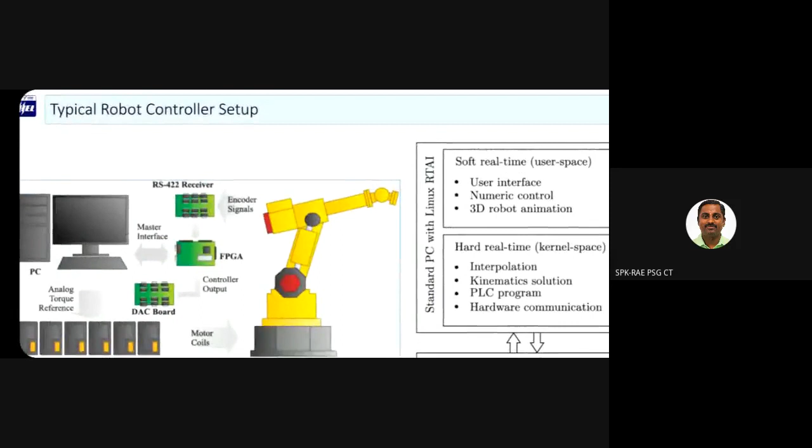So finally, I would like to highlight this, the current state. What we can expect is already available. Somebody asked about what resolution of imaging we need to consider, what capturing rate of the camera we need to consider. The answer is, today you go blindly to any vendor, get a camera at the lowest rung of technology, don't specify anything, just say I want an image capturing device. He will give you a camera, CMOS or whatever technology. That image resolution by default technology is more than sufficient for you to use for your weld seam tracking. That's what I'm trying to convey.

The application today, we have a saturation in terms of algorithm, programming language, and sensing mechanisms. What we can say is fit-for-use is being taken care of by default. You need not break your head over whether this is sufficient.

As far as welding is concerned, please understand, if you are going for inspection, we need to be careful. Part inspection or welding inspection is different. I'm only talking about implementation for welding, where the robot is going to hold a torch for welding. In that case, the technology is being sufficiently taken care of. We are at a level wherein we can just take default devices, plug them in, and make a system. Then what is next? What am I looking for?

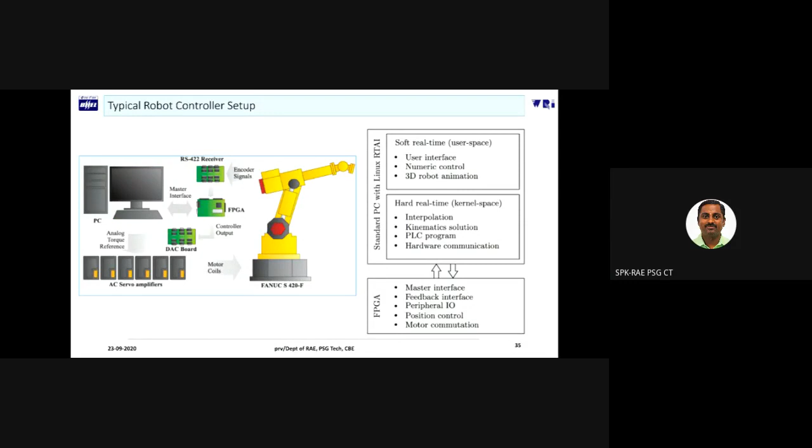What I have to look into is, what is this Industry 4.0? I guess this might have been talked about, but still I would like to give my two paise kind of definition to what it is. Today we are talking about cyber physical systems. A cyber physical system is my aspiration that my robot, if given a task, is as good as me in terms of thinking and executing the task.

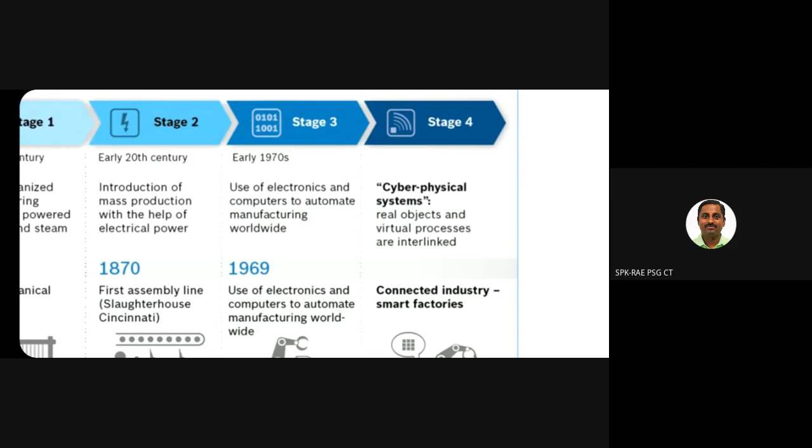For this to happen, if I am there in the operating environment, I have 360-degree sensing. My entire body is a sensing mechanism. I gather information through all my senses, and knowingly or unknowingly, consciously or unconsciously, my torch movement is a control action for the information I receive through all of the sensors. So whether my instrument is capable of a similar approach is the definition for a cyber physical system. Real objects and virtual processes are interlinked, for which I am looking at some kind of connectivity. So this is, in a way, we are entering into a so-called artificial intelligence in a factory environment, and that is what is being talked about here.

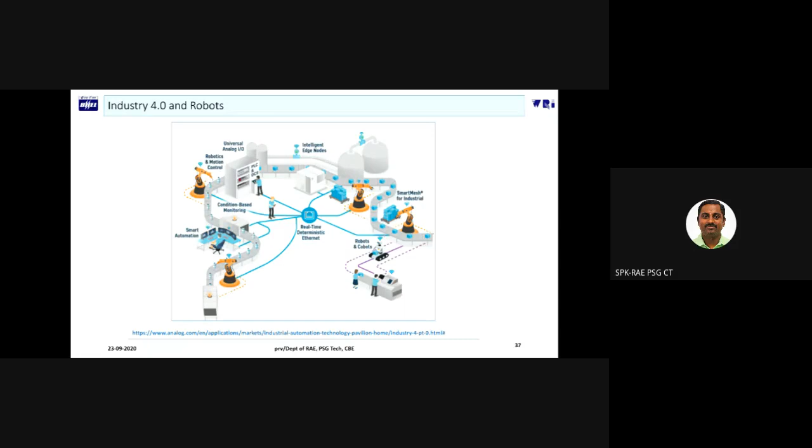This environment, I am not showing any welding torch here, but welding is one of the activities that could be performed all along the way. So this is what we mean by connectivity in Industry 4.0. A robot should be able to communicate by itself with the surrounding environment, and that is what we are looking at for Industry 4.0.

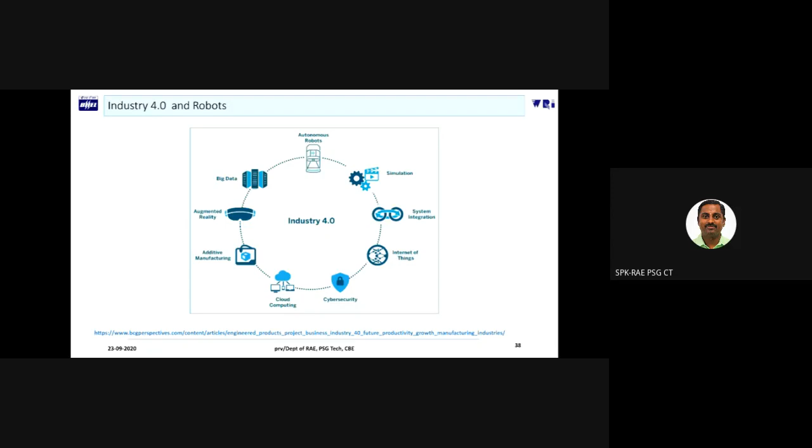I already defined that whenever I talk of a robot, welding is a teamwork. A robot should have a good team with respect to its programming colleague, with respect to its operating environment colleague, with respect to the systems colleague and the controller. Then only it can be successful, it can work optimally. Similarly, in Industry 4.0, robots have to have much more confidence in trading with all these factors, what we call big data. For example, I will keep on recording data of my history. I would have welded 100 pieces so far. So the essence of all the 100 pieces, on average, at each work spot, suppose I weld 300 mm on average, each of my first mm, second mm, third mm, I will communicate or take a decision with respect to what has happened on average for all the previous 100 jobs with respect to that location.

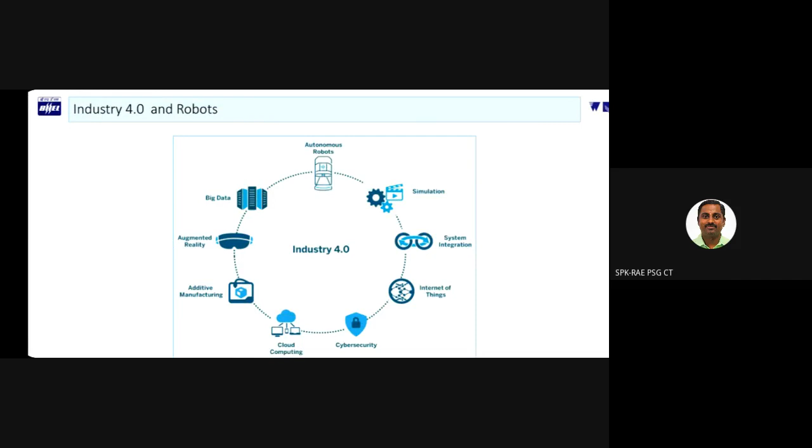So that is the essence of how you handle that data, how you communicate, and how you take the suitable control action. So your Industry 4.0 defines these robots no more as robots, but as cobots. These are collaborative robots. Collaborative robots, or cobots, are the future of what we call automation. So we will end up with cobots in future, which is nothing but a scaled-up autonomous initiative of what we call intelligent robots today, and what we have seen today.

And it is nothing but improved; that is, whatever you have considered for sensing, whatever you have considered for control, will happen in real time in response to all the physical variables that are dictating you in the operating environment. So cobots are going to be the future. I hope we see cyber physical systems and cobots in the welding domain at the earliest. For this purpose, I have referred to all these papers and sites, which I have given you as reference.